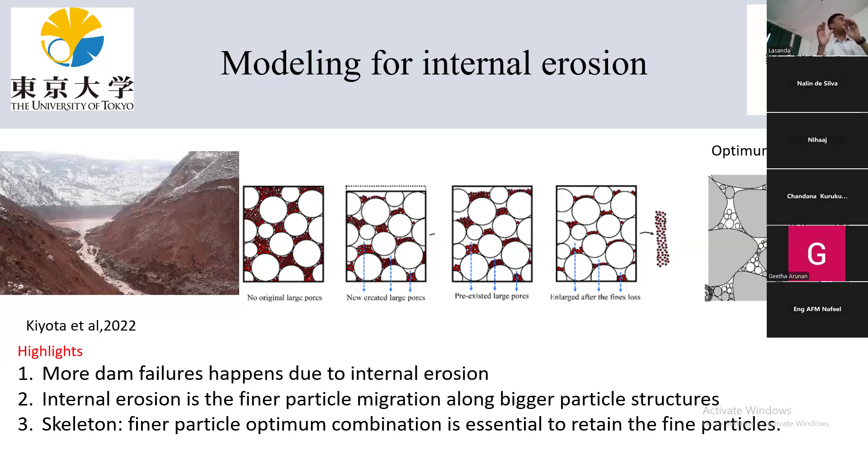So this particle we call a slaking particle. Slaking particle means if we apply the drying and wetting cycle, the seasonal cycle, it gets broken, dismantled, and the particle gradation changes. So our research basically tries to find what is the optimum of this skeleton particle to make the water retaining structure.

So the slaking particle means it has some clay content. While we are doing the drying and wetting cycle, the particle breakage progresses, which causes severe disturbance of the particle gradation, which may be influenced by two factors.

One is the dry-wet cycle as well as the temperature. If we couple this with drying at high temperature and wetting at lower temperature, it exacerbates the progress. Severe and progressive particle breakage has been observed in the literature. That's why this coupling of the cycle is introduced and proposed by several researchers to accelerate the seasonal factors.

So within 3 years for doing a PhD or 2 years for a master's, we can't simulate the seasonal factors for 50 years. We want to accelerate it in laboratory conditions to find the long-term effects on the water retaining structure.

That's important, so we're proposing this coupling effect, as some leading researchers also propose. Of course, particle gradation is another effect of void reduction, because this dry-wet cycle happens not in a pre-stress condition but under stress condition. If any particle breakage happens, particle rearrangement definitely happens, which results in compression.

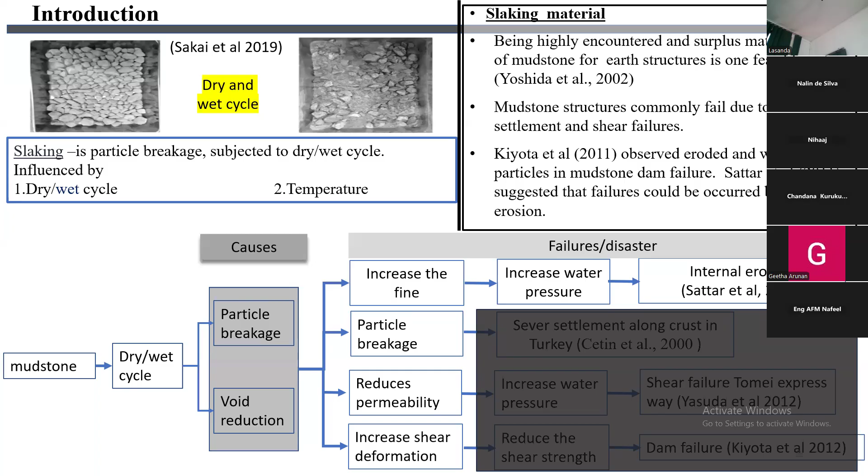So this photo was taken by Dr. Danuska in the laboratory setup. This is a very simple laboratory setup, no need for any special knowledge to understand. Just applying the vertical pressure, the hyper pressure, on this gravel material, applying wetting, simulating the dam structure.

Wetting means not merely wetting, but wetting plus hydraulic pressure, and collecting the particles washed out with this pressure. At drying time, we supply fluctuating dry air with high temperature to make them dry.

The drying temperature is 56 degrees Celsius, and at wetting time we keep it at 25 degrees Celsius. Why 56 degrees? Normally the dry-wet cycle proposed is 110 degrees in our laboratory experiments, but if we increase the temperature, sometimes unrealistic chemical changes result, overestimating the settlement behavior. That's why we purposefully kept it at 56 degrees, which is okay for this soft sedimentary rock, with no possibility of unrealistic reactions at this temperature.

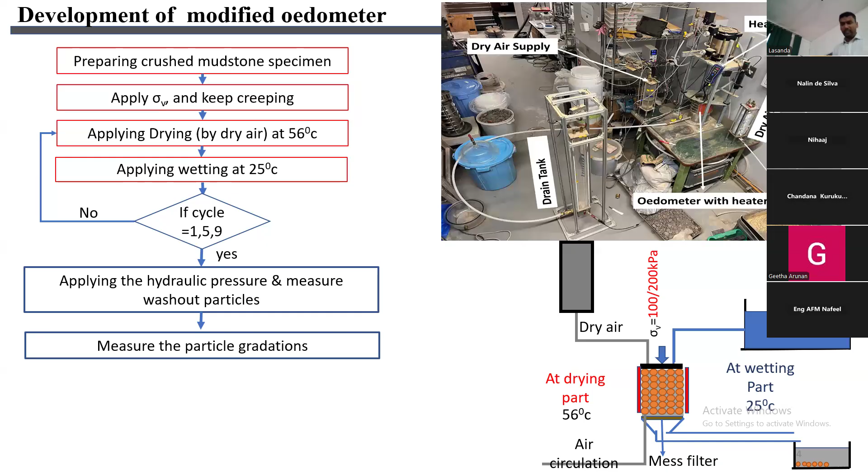If no breakage happens, like in metals, we can't expect any sort of erosion. In between, there's a behavior where the material still has the skeleton intact, but is developing or increasing the way for fines to escape, resulting from internal erosion. So you can see the rest of them are almost free of internal erosion, but the material we call Hamamatsu, referring to the area where we collected those samples, shows excessive internal erosion around 10%.

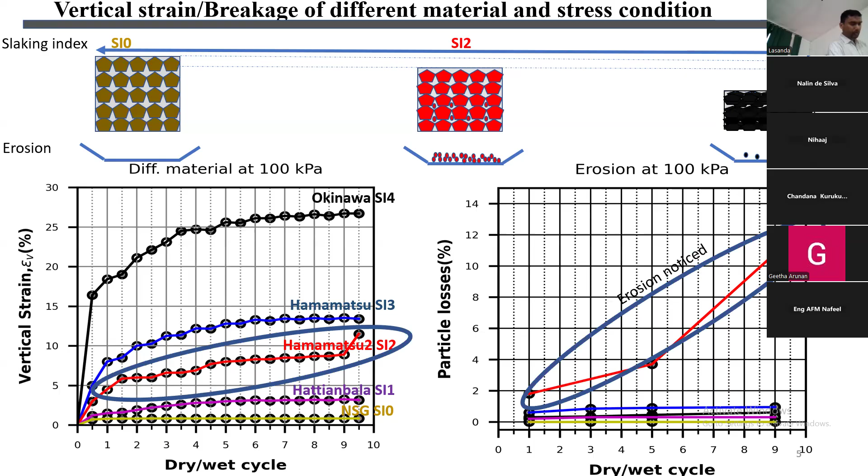After that, particle gradation is the most important factor we want to analyze in why this internal erosion progresses. So we did one more test, changing the vertical pressure. Why vertical pressure? Changing the vertical pressure, increasing the vertical stress, and void is also one of the parts that can trigger or influence the internal erosion. At 100 kPa we already observed the erosion, but at 500 kPa we didn't observe the erosion.

And we arranged 6 experiments and went through the same drying cycle, stopping after 1 cycle, after 5 cycles, and after 9 cycles, and did particle gradation analysis, and this is how the particle gradation turns out. So in this particle gradation, what we can see from this figure is that this particle gradation is susceptible and subjected to internal erosion at 100 kPa after the 9th cycle. The rest are safe enough; there is no particle erosion.

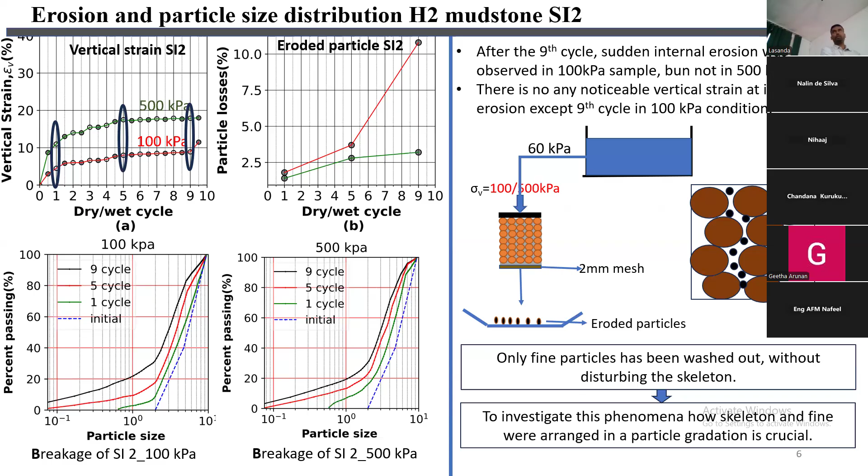There are two coefficients we want to discuss regarding internal erosion. One is that we want to separate the particles which we call the skeleton - skeleton meaning carrying the stress. Another part we call the fine or free materials, which are just inside the void.

So what we are expecting is that this is the skeleton. By this skeleton, the maximum pore-to-pore connection would be D15. Why? We can prove it geometrically. If it is this particle gradation, the maximum pore-to-pore connection would be D15. It's geometrically proven - I'll just avoid it now, but later we can discuss how it comes up.

This bigger pore, the leeway, should be clogged or blocked by the bigger fine. That is the initiation of the clogging. Clogging initiates when the bigger pore should be clogged by the bigger fine. That is the first part to make the clogging happen.

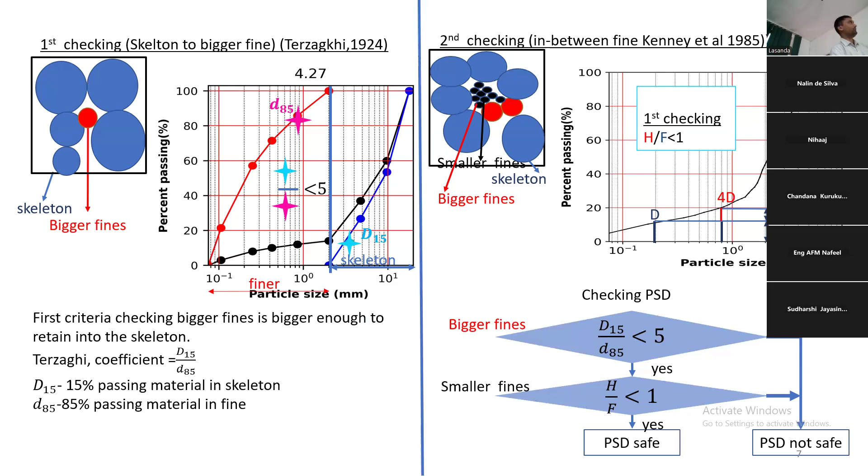So what we can do is - this is the 100 kPa, the 500 kPa - we did two coefficients. We just developed two coefficients. Here is the first coefficient, and here is the second coefficient: D15 over D85, this is H over F. This one is talking about the first clogging happening - bigger pores clogged or blocked by the bigger fines. This one is about, after this happens, how the small pores retain the fines.

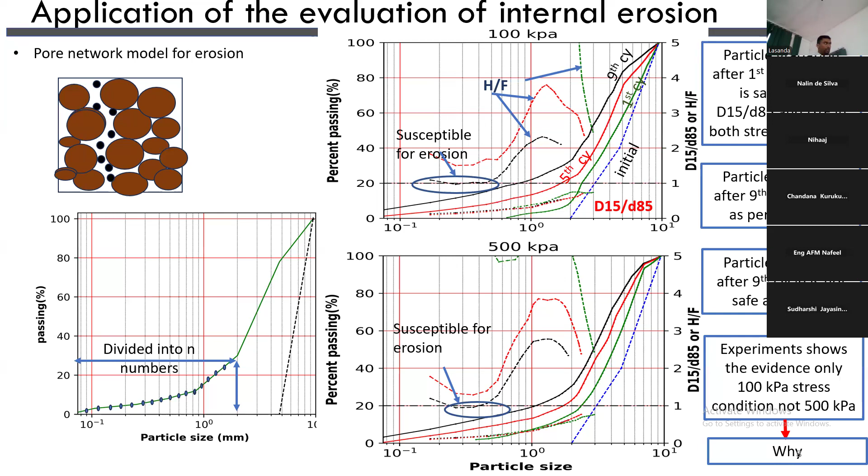So let me discuss again how this internal erosion happens. If we are applying the pressure here, after the particular cycle, the smaller particles would be washed out. The bigger fines we found would be the separation point.

So whatever is bigger than that fine we found here would be called the skeleton. We just take the assumption. Whatever is lesser than that, we can call it fine. Then we can do the separation. This is the skeleton particle gradation, and this is the fine particle gradation.

So here, we know the skeleton gradation because we already have the particle gradation, and we know the density of these skeleton particles. By using that, we developed one virtual specimen in the lab. It's 3D, and it's 2D for the very narrow range of particle size.

So if it's a very loose packing, we can assume this sort of arrangement for how the pores are connected. Pores are always irregular in shape, but pore-to-pore connection always has this sort of arrangement. Here, in a denser case, we have this sort of arrangement. We want to find geometrically what gradation can pass through this filter.

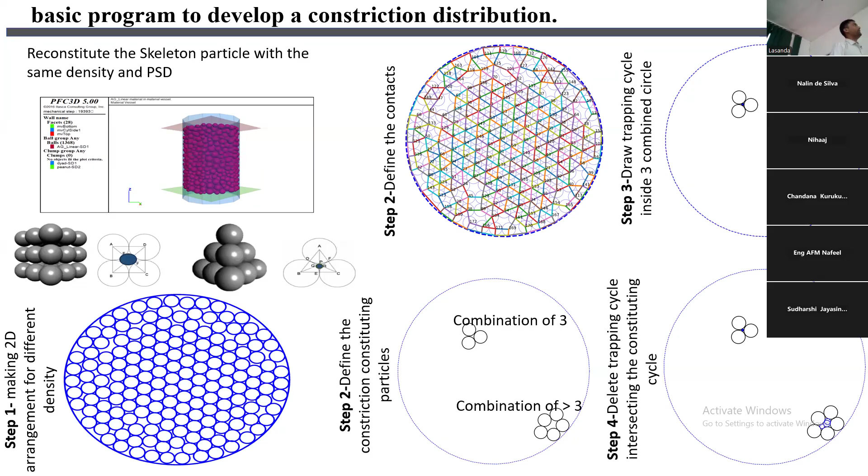So firstly, we try to find what is the contact. After that, we try to find what materials are involved in creating this pore. So here, this pore is constituted by this part. So how can we do that? I will explain it.

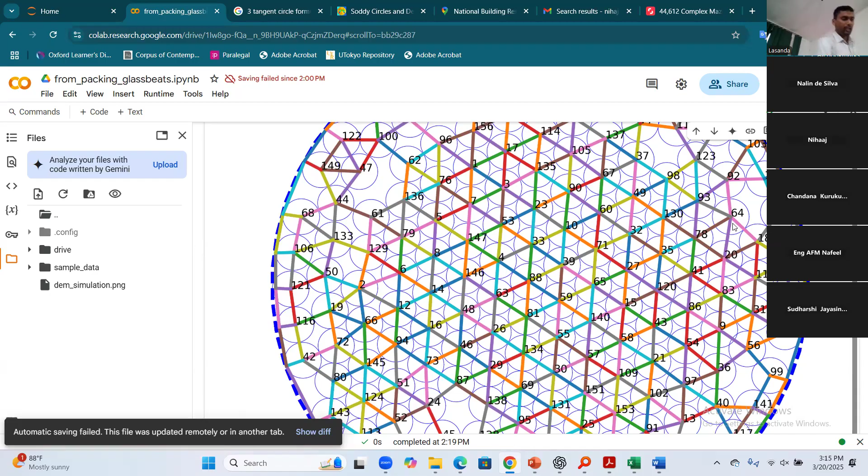So there are two types of particles we can see here, two types of circuits we can notice. One is a 3-particle combined circle; another is a more-than-3-particle combined circle. So firstly, we try to find what circuits are there, how many circuits are there, and what type of circuits are there.

After that, if it's a 3-particle circuit, geometrically we can find what particle could escape into that pore. Because geometrically, for every 3 particles, whatever they are, we can find one circle tangent to them — 2 circles tangent, inside and outside. So here we're able to find geometrically the one circle that can be transferred to this circuit.

Here, we can't find the one. It might have several, but geometrically it's not possible. To find a circle tangent to 4 particles, it's possible sometimes, and impossible other times.

So what we do is try to optimize by doing some geometrical operations, to find the bigger circle that can pass through this constituted arrangement, and we try to find what is the maximum one.

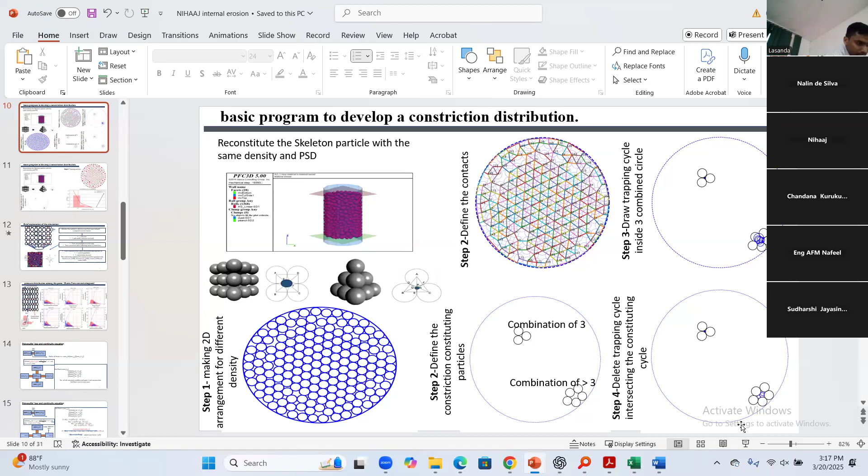By doing these things, we are able to find what particle distribution can escape through this particle arrangement. This is the distribution representing the red color. The message here: particles bigger than this have no way to erode, particles lesser than this have no way to retain. The particle in between has a probability of passing or being retained, probabilistically speaking. For explanation we used the same size particle, but in the realistic case it's more complex, and this distribution would be almost the normal distribution.

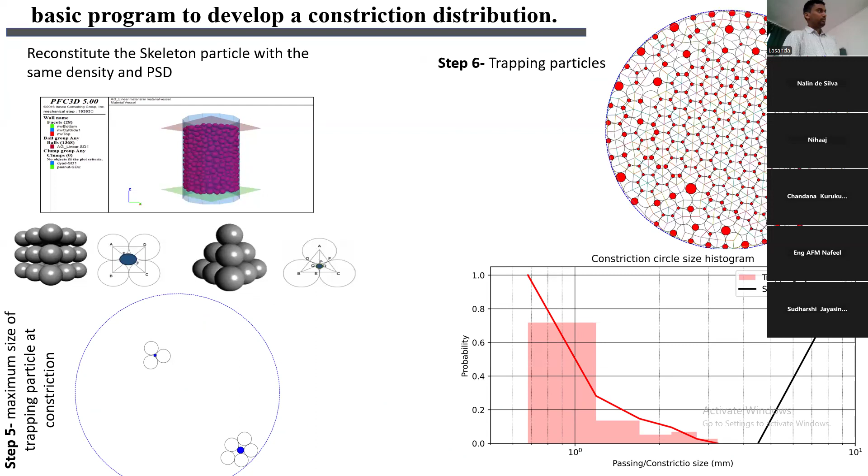After that, we make the virtual pore distribution. We assume pores are arranged in a cubical way, with every pore having 6 connections along their faces. This connection distribution will be the same as the distribution we worked on to find it.

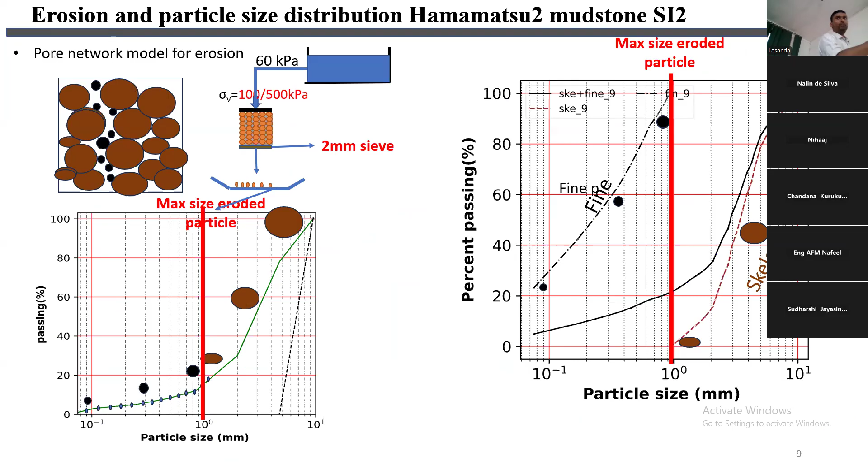Then we have the fine particle distribution. We equally placed all the particles in these pores.

After that, this becomes like a puzzle of finding the escaping route. If a particle is able to find the escaping route, we call it an escaped or eroded particle. The constraint is that the particle should be lesser than the constriction for the pathway - that's one condition. The other condition is that this pressure should be higher than that pressure, otherwise the particle will not move.

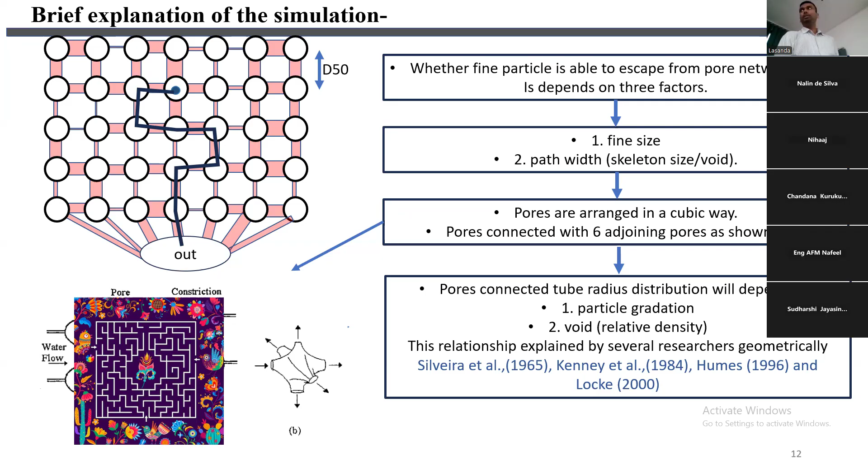So another problem comes up: how can we define the pressure at this pore? Otherwise we can't do the simulation. So we need to find the pore pressure - it's a very popular problem.

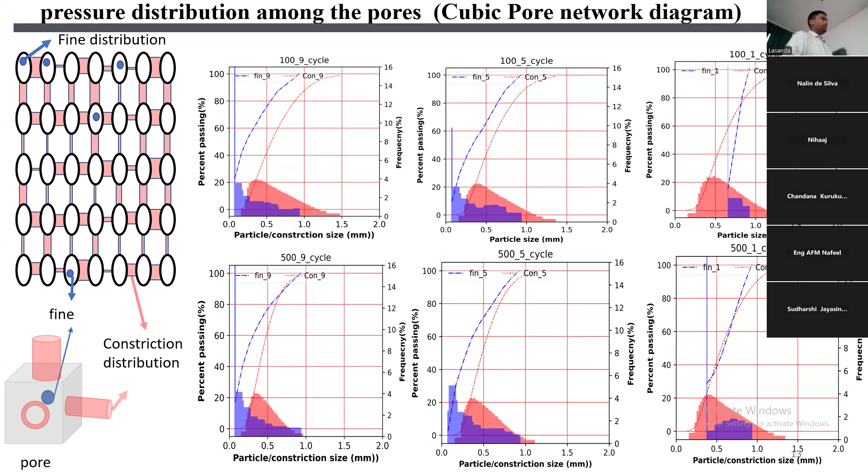So again, we consider how we can calculate the pressure. We know it's shown in 2D, but actually it would be 3D. One pore is connected with only 4 connections here, but in our real simulation it would be connected to 6. So the net flow on this pore would be 0, because earlier it was saturated and now also it's 100% saturated. So we can apply the continuity equation, which we can write like this.

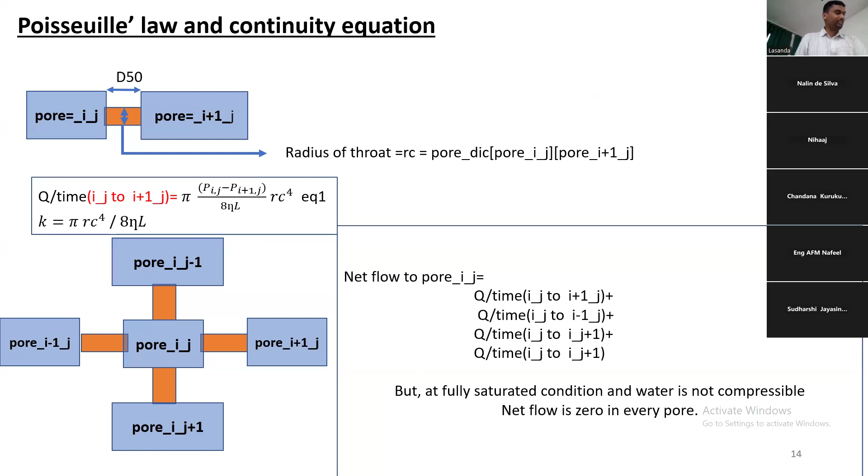In our case, we have 40,000 pores, so we can develop 40,000 equations - 40,000 equations, 40,000 unknowns. We use a fast matrix approach, and Python is well suited for this kind of work. We are able to find the pore pressure distribution.

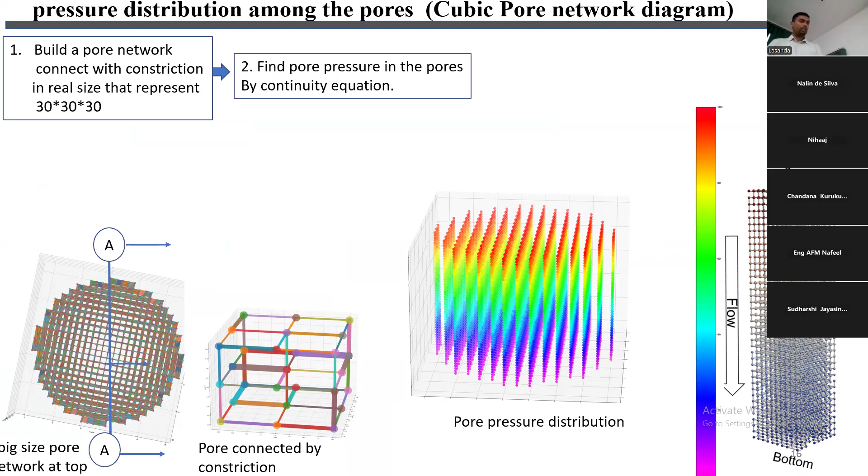This is how our pores look - this is the top view, and this is the zoom view of a particular portion, showing how the constrictions are distributed. This is what I tried to explain, how we came up to this point.

And then we do the simulation. We developed an algorithm where, for a fine particle, it checks which way it can find the higher water gradient, meaning the lesser pressure direction. If this is the lesser pressure path, the particle tries to move that way, and checks whether this path is enough to go through. If not, it checks the second gradient path, third, and fourth. Ultimately, if it cannot find any way, we call it a clogged pore - meaning this pore will not participate or take part in transferring any particle further.

If this particle finds the way to go out here, we can call it the eroded particle. Then we try to represent these numbers. This is always a very high number, 1.6 into e to the 7. High numbers, so we do a very high simulation.

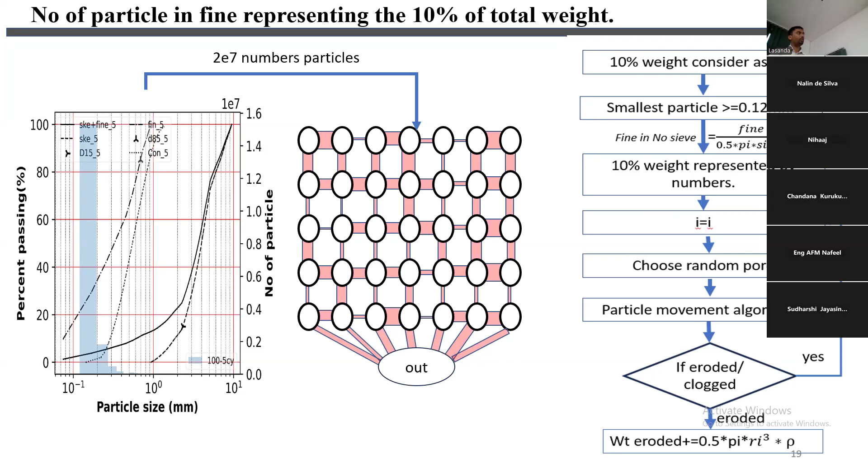Every particle wants to move here, here, here in 40,000 pores. It may have around 4 lakhs movement, so every particle should have 4 lakhs iterations. The particle number is e7, so it would be very huge. We can't do it with our computer, so we invoke a supercomputer to do these erosions.

What we found is the rest of the particles show clogging. There is no more particle washout happening; it seems to be flattened. But at 100 kPa, where we found high erosion, it shows increasing particle washout along the time.

Increasing particle washout shows some relations qualitatively. This erosion could be explained or interpreted by our simulation, but not quantitatively, because this clogging is a little complicated. So we're unable to represent a one-to-one quantitative match, but qualitatively it shows a good relation.

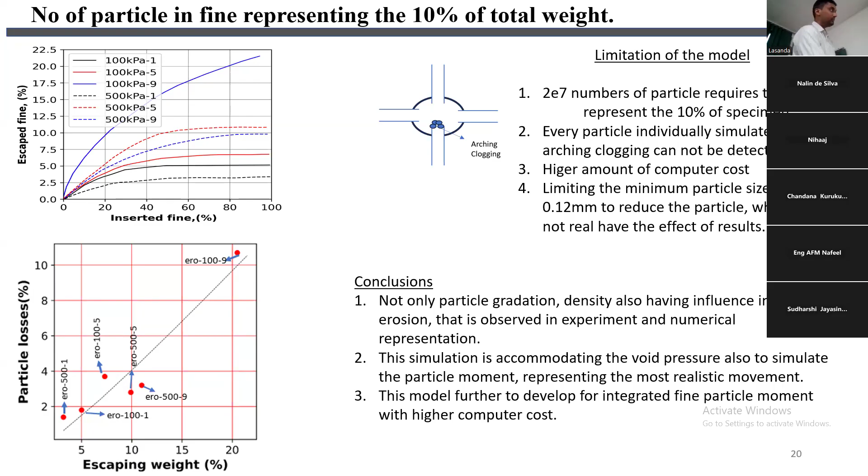Later, we tried to determine how these seasonal factors affect the internal particle, causing breakage. So we took several assumptions and made the DEM simulation on a single particle. For the single particle, bonded particles have 9 influencing factors, but with some assumptions we reduced it to 3, all having strong logical backgrounds.

So this is the internal particle stress behavior. If it is inside, that is the bonded particle. If it is moving this way, we can say tension failure happens. If it moves this way, we can say shear failure happens.

So we started with some empirical relation of 3 parameters: K, which relies on the Poisson ratio; E, which relies on the stiffness of the particle or specimen; and cohesion, which relies on E and K.

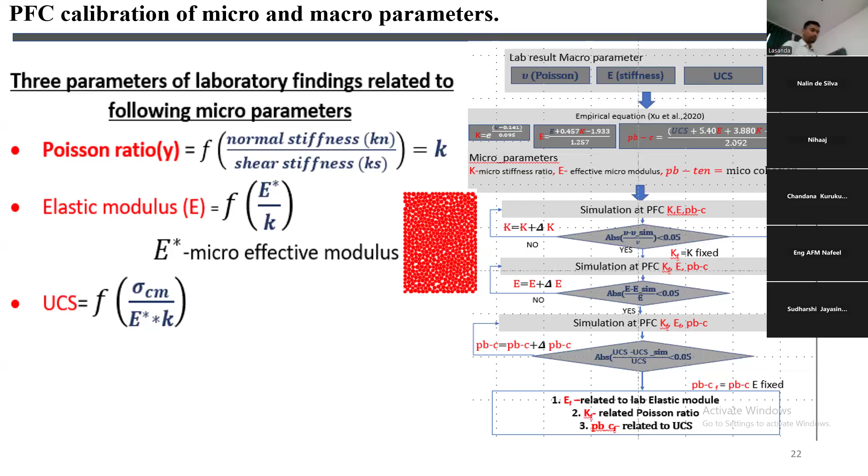So for example, this is how we work. We change it, make the simulation, measure it in the laboratory, and compare it. So for example, let's just take it: this is the real relationship. We don't know it, we don't know it.

This changes with different materials. This is a real relationship, but this is the empirical relationship for some other material. There are a lot of materials that have developed this. For this, we want to do at least 100 tests to establish this relationship. What we can do instead is use a target value from the testing.

We just project the target value, what value we want to set for the simulation, and do the simulation, and we can find it. This is what the simulation offers us, but this is what we are expecting.

Then we shift the empirical relationship to this point and do it again. We just project this one to here. This is what we are expecting, and we do the simulation, but this is what you observe.

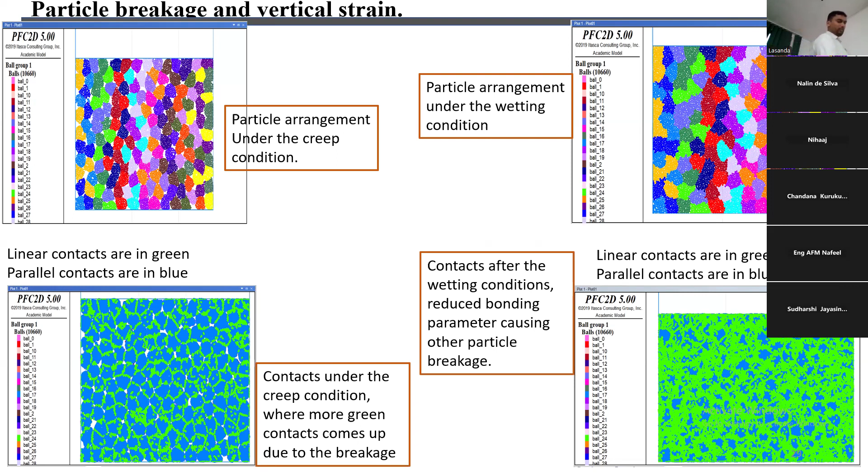Again, how can we measure the particle gradation? Because we have the particle gradation at the laboratory, how can we measure it in simulation? It's another challenge. We should find what clusters have the cement contact and what clusters don't. We call it the transportation matrix.

After that we rotate it. We should find the sieve size - what the sieve size is. We should rotate it small, and find what is the minimum projected thickness. So if it is this one, this is the projected value - that's what we call the sieve size. So we just make the sieve size for both.

This is the simulation of how, after applying the pressure, we slowly change it, then we can see how the particle breakage happens. This is only for presenting, but our model is a little big so we are unable to show it all. So this is the particle breakage.

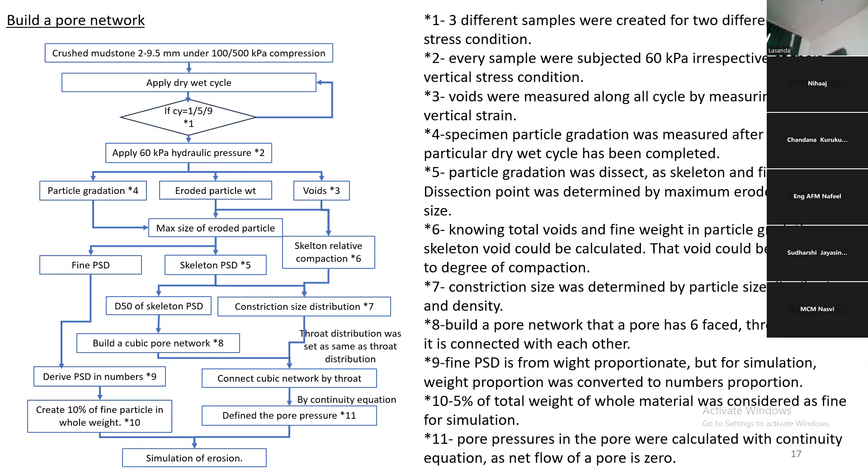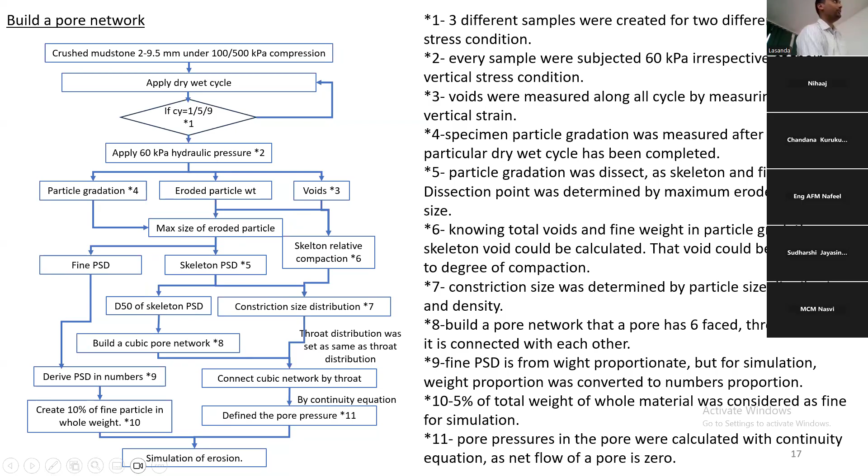This you can, yeah, you can come in. Contact models. So in the earlier case we don't consider any contact models, but no need for that. In here we make the linear contact.

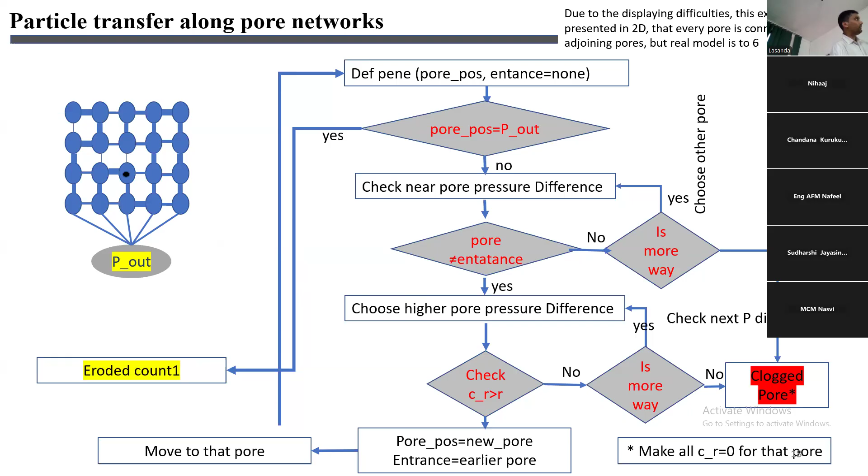Inside the particle we can measure it. Inside the particle we just notice every point, every millisecond, what is the stress condition of that every point. So if the stress increases, if it exceeds its capacity, like this...

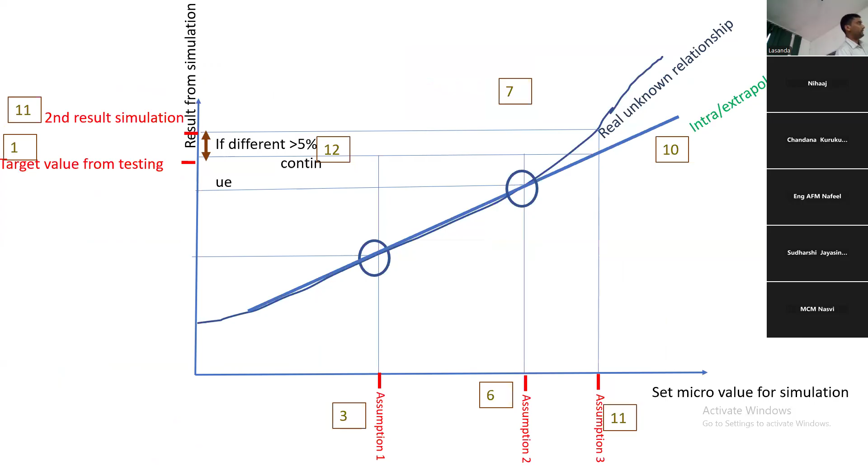If it exceeds the capacity, it will make the tension. In this way it will be the shear phase. After that it's a linear contact - there's no more any cemented contact.

We normally do the Hertz contact. Yeah, we don't model the contact, but we try to calibrate how this contact would be assigned for different material properties, what we can measure in the laboratory. With those properties, we can assign the internal properties.

Because it's very difficult, the most challenging part of PFC or DEM is how we can make the internal parameter. That's why bonded particle and particle breakage modeling is not so popular in DEM. DEM normally models particle flow and rock falling - those things are analyzed in detail by DEM, but not internal particle behavior, because the calibration is so difficult. So we are proposing a new calibration method to make it a little simpler.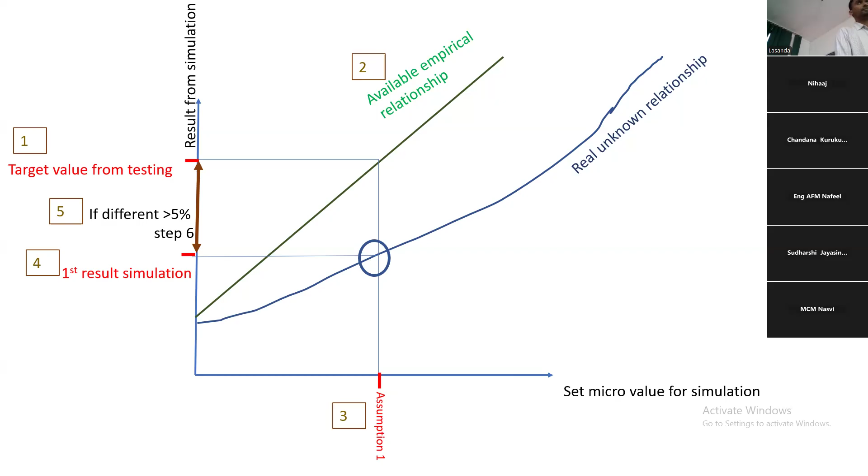How do you check the water drainage of the problem? Yeah, for DEM to simulate water is very, very difficult. So that's why what we are doing is a little innovative approach.

What we are doing, firstly, we calibrate the properties of what is wetting, what is drying in the properties. And we assume there is water. Then the internal property will be changed or reduced. So we don't use any water particles, we don't use any water particles.

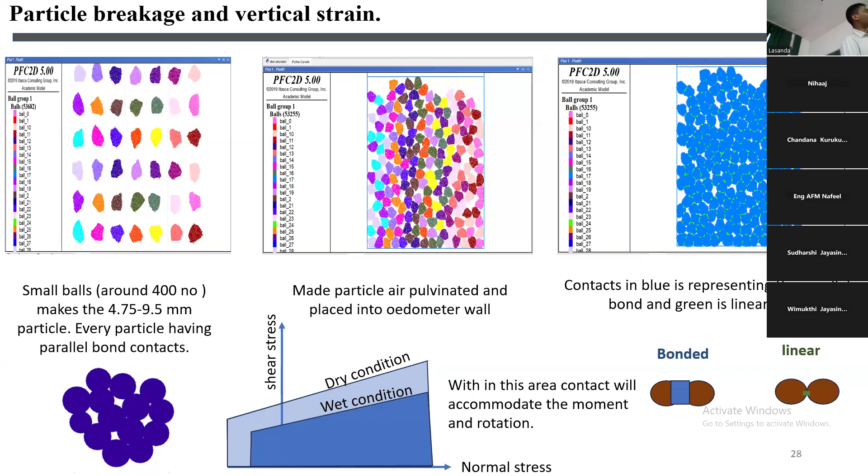We only do the calibration for particle breakage, not the erosion. Erosion we can do it. There are several ways we can do the erosion, but I didn't show these. If there are free particles and we don't have the contacts, we can make the same simulation in body, but not with the water pressure, because it's almost impossible to use the water pressure and water for this small model.

Need a very huge model and huge amount of machine power. We just simulate and mimic the water effects, not the water. That means every microsecond we just monitor these contacts, and check if it is exceeded. Normally it works on Newton's law. If forces are applied, it will move. If not, it will stay there.

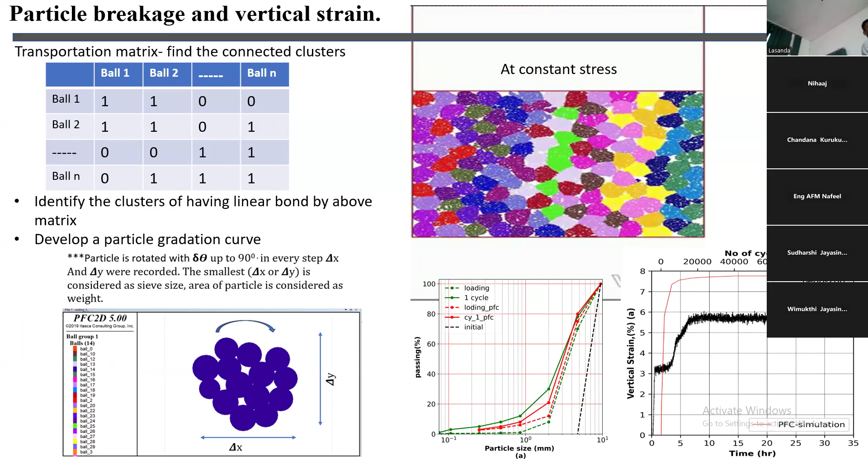So in the last portion it was also very problematic for us. It is separated like 200 particles in one way, 3 particles in one way, 50 particles in one way. We should make clusters, and find the clusters which have a relationship with which particle. That is one of the major parts to do the sieve analysis.

The impact of this dry-wet cycle - we stop it, we don't have the time, we just stop it at this cycle. We don't go further after that, but we can do that, yes, we can do that.

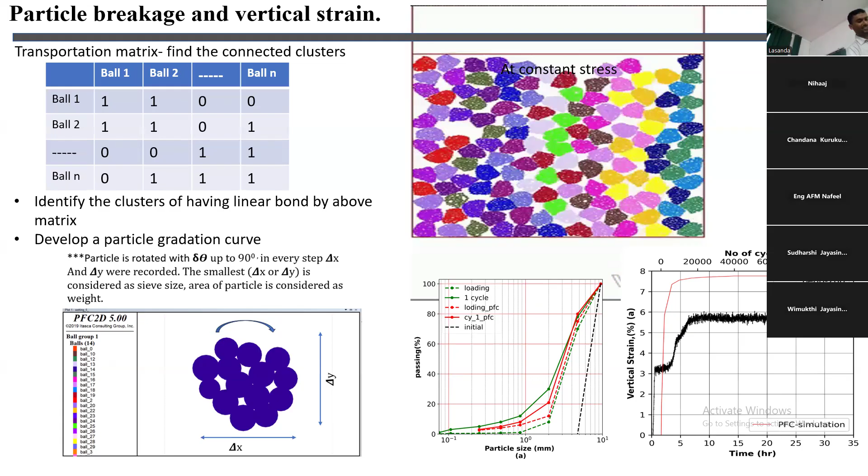After that, we want to do the calibration earlier. What will happen for the second cycle? Here we do only calibration for the first cycle. We want to do the calibration for what will happen after the second cycle, third cycle, and fourth cycle. I think it will take a long story.

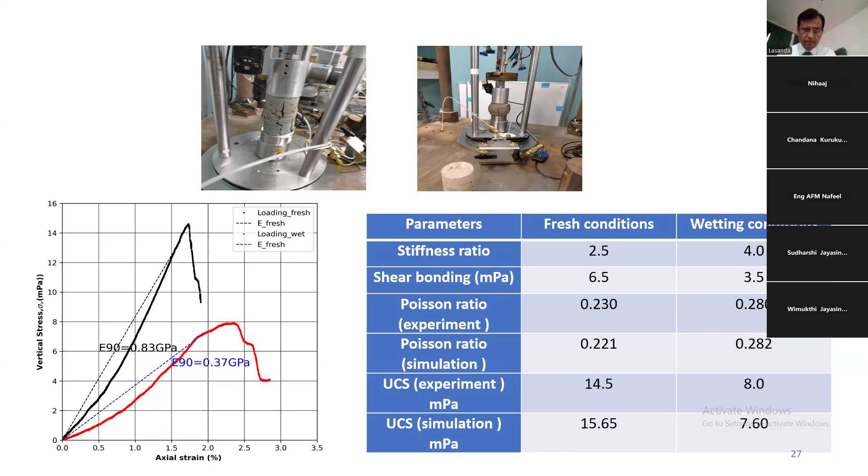Any question from the online audience today? They are talking, but they're already muted. Any question from the online participants? You can put it there. We can check, there are 8 questions.

Online participants can raise their questions through the chat box.